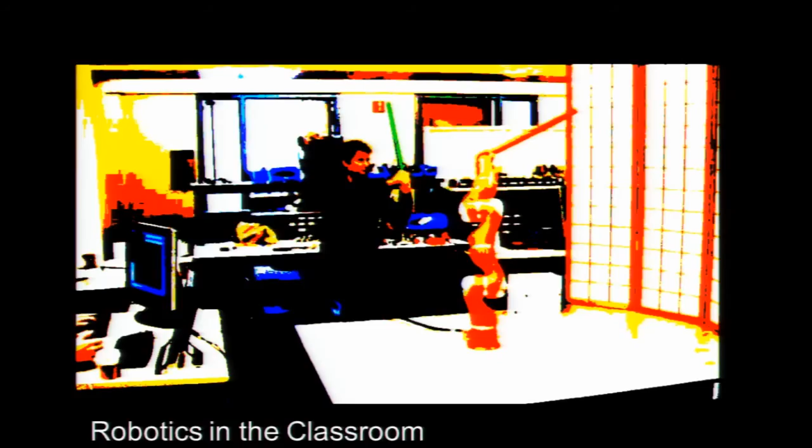Our students love it. This is one example of the experimental work. This is actually class work, a project of 3 weeks, where the students are programming the robot to attack, to fight, to defend, and to perceive the humans, and doing all of it in about 3 weeks. So we should recognize that really there is possibilities of interaction. We can now do it. And what are the challenges and what are the things that we are facing in those areas?

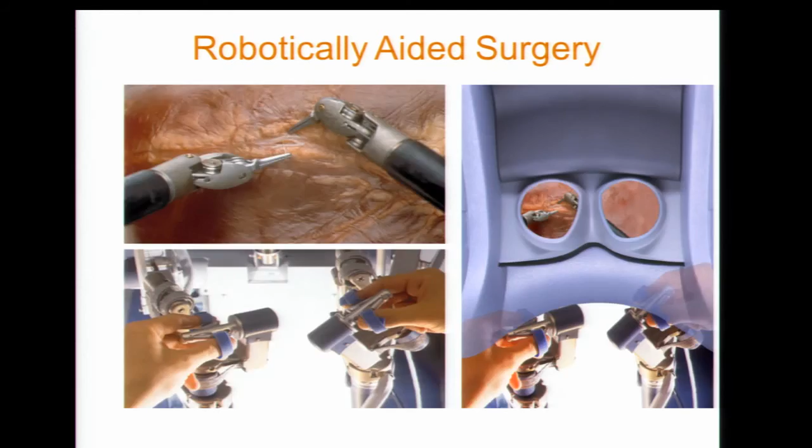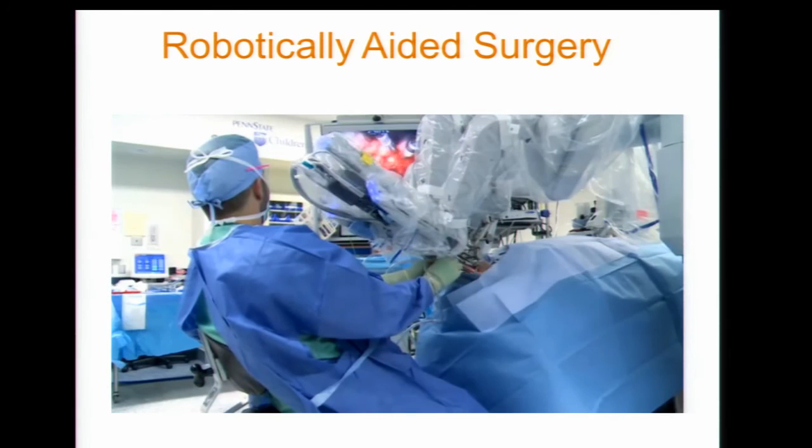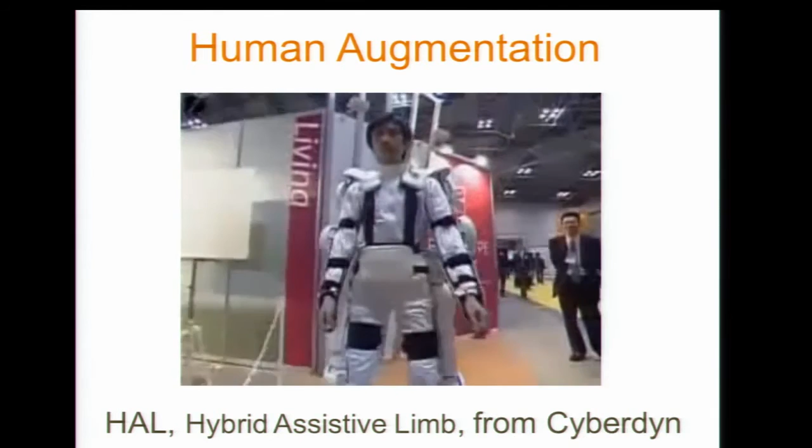So we know the success in medical robotics, the success of now doing minimally invasive surgery, doing this by connecting the human to a robot through a haptic device that is still not using the feedback in one way, we are using mostly vision. We are using more haptic and maybe some more feedback with catheter technology. This is some work from Hansen technology. There are a number of other applications where we see the human and the machine together.

But really what I would like to talk about is those new challenges that we can imagine. And to talk about it, I'm going to take the example of this boat. This is archaeology underwater. And this is a boat called La Lune in French, which is the moon. And it's a 1700 boat that was returning to France and sunk off the coast of Toulon, about 20 miles off the coast, 100 meters down.

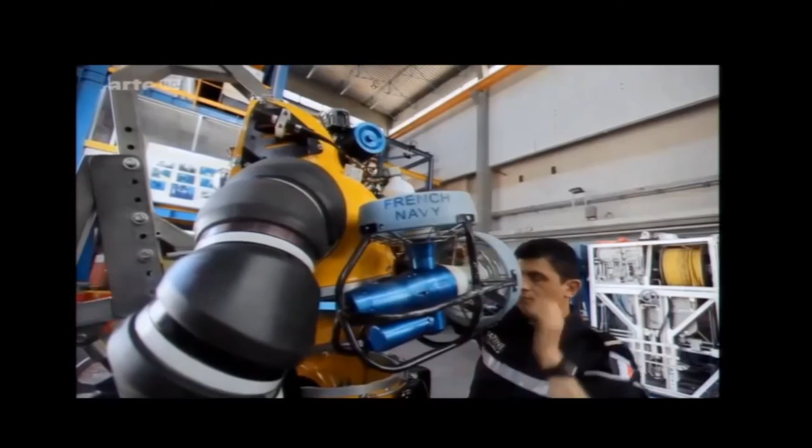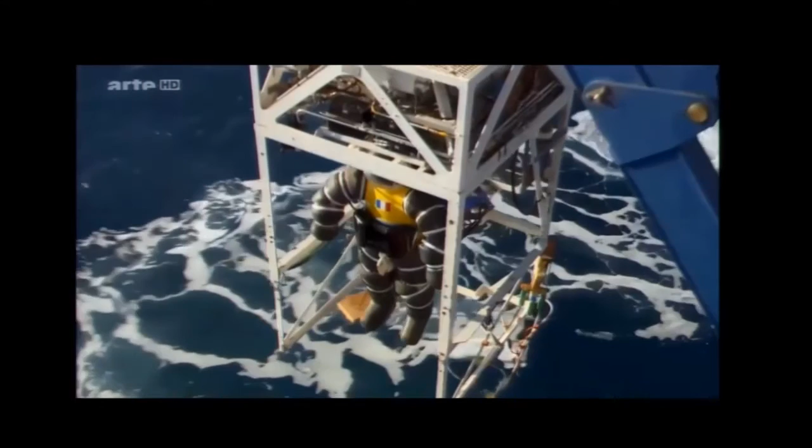So any idea about going there will prevent divers, because diving can be done at 30, 35 meters, but 40 meters is really the limit. And what you need to do is to build a very heavy, stiff suit where you place the human inside. And now this suit cannot be operated by the human inside. Obviously, you have thrusters. It's very complex. They operate it from the boat. This is the scientific boat that is lowering now the human to that area, and this could work up to 150, 200 meters. So below, then it becomes another problem.

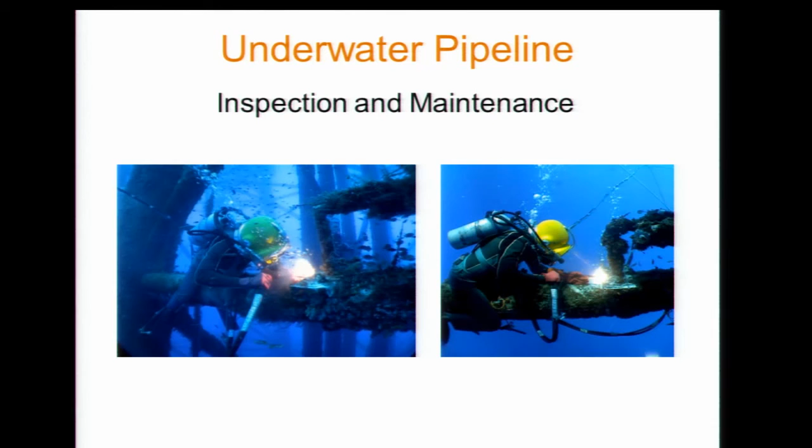And the question is, can't we do better? The human is there just because the human is going to be able to grasp one of those objects and put them in a container, and that would be sent up to the boat. So the problem today is not only in underwater archaeology, but in coral reef monitoring. It's really, really difficult to think about ways of going there, placing sensors, collecting samples. If we think about all the structures underwater, there are so many problems that we need to have a manual manipulation intervention that requires human divers, and it is really a dangerous, challenging problem.

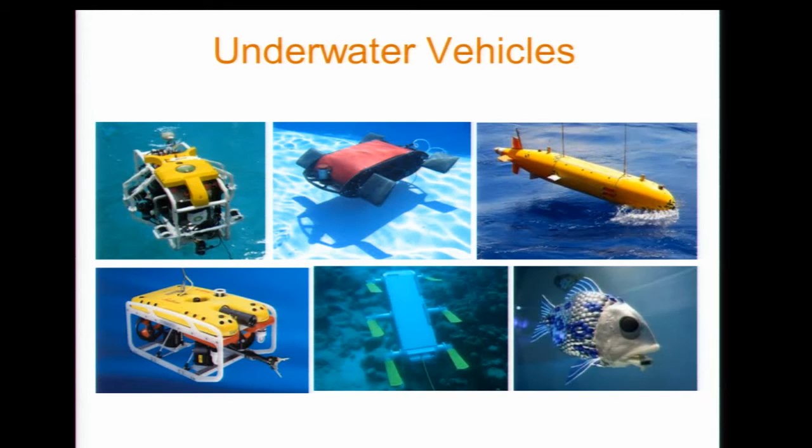Now, the state of the art in robotics is really fantastic in terms of underwater observation. That is, we have underwater vehicles that can observe, that can see, that can map areas. But we have little capabilities of manipulation. I mean, we have some manipulators that are really difficult to operate. They need to be teleoperated. We don't really have the capabilities of doing like we can do on the ground, mobile manipulation.

And that brought this idea of Ocean One. Ocean One is a robot that we've been building over the past 4 years. And Ocean One is a bimanual robot with hands, head. I mean, you can think about it like a humanoid robot underwater.

It doesn't have legs, but it is operated with thrusters, so it's adapted to the water. And the coolest part about it is that this robot is connected to the human. And when this robot is going to touch the bottom of the ocean, you can feel it in your hands. And that is because the concept that we are using is to connect the haptic device to this robot through fast communication that allows us to feel and interact, not to teleoperate the robot.

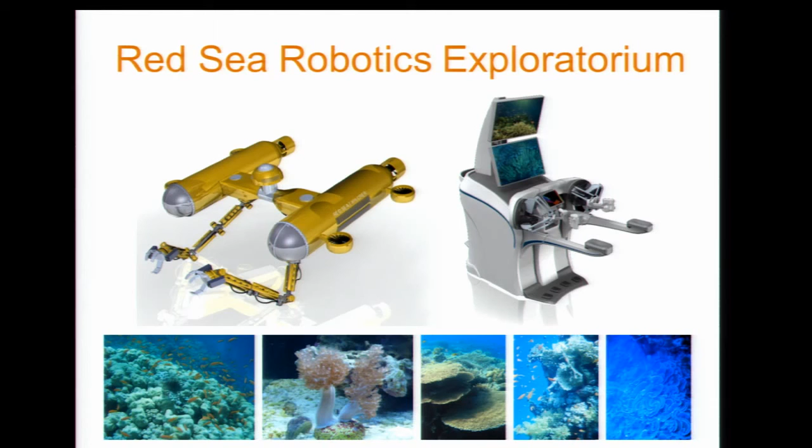We don't want a human to teleoperate it. It wouldn't work, because humans would be very bad at creating those manipulation interactions. But a human can intervene at any moment in the system.

And to do that, you can imagine a seabed village of robots connected to a station where they can get power. They can also make a connection, fast connection. Acoustic is not good for fast connection, so we use optical modem. And optical modem is light, which is attenuated, so we have limited distance. So that station is very important to do the connection to the boat where a human is interacting.

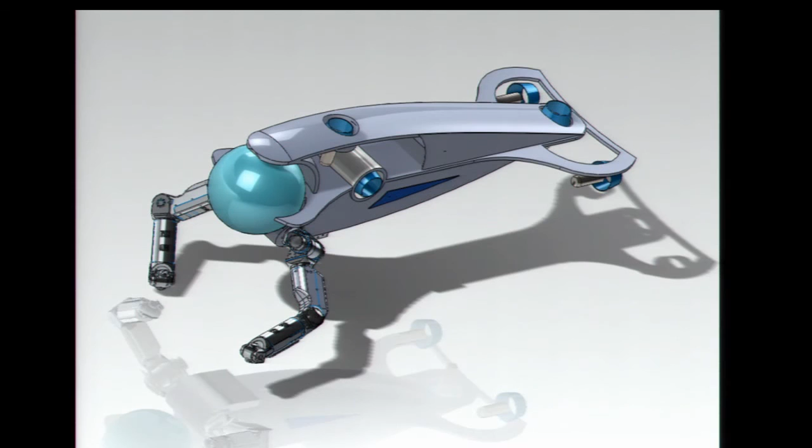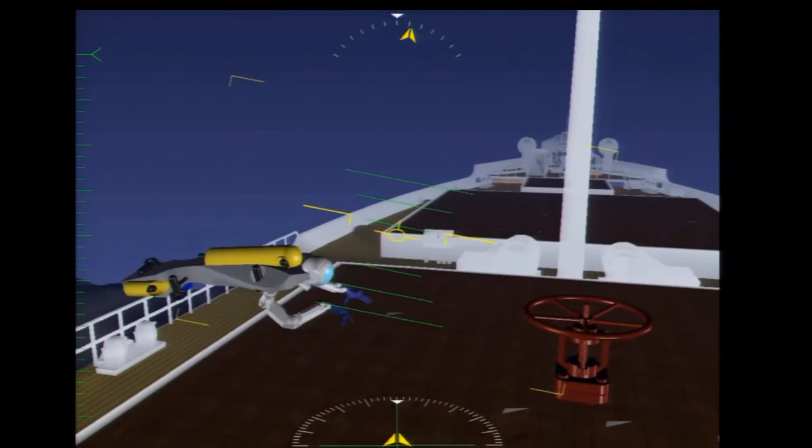So the design was amazing in terms of complexity. We start with the bimanual manipulation, and then we find electronics, more and more things that are needed. And then we are not talking about designing a vehicle and attaching arms. We are talking about designing a whole system together, where we need really to understand the dynamics of the vehicle, which is slow, compared to the dynamics of the arms that is faster, and design a macro-mini structure that allows us to build those capabilities for dynamic control and operations underwater.

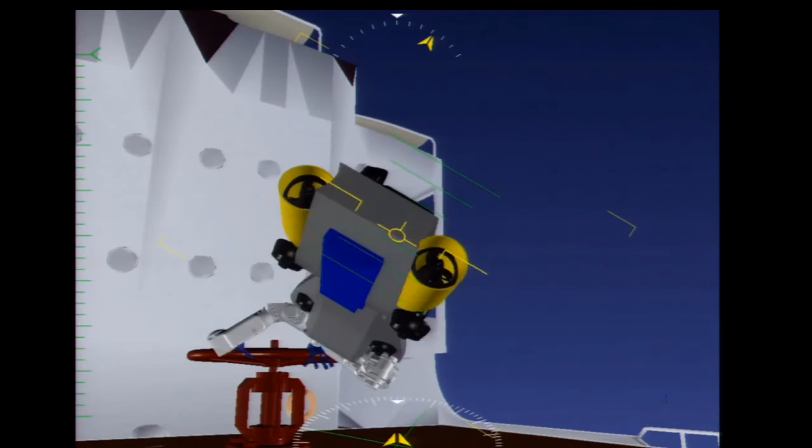Fabrication, we've been lucky to have the help of Meka Robotics with the arms, but we had to redesign the whole arms together with them. And we had also to build all the electronics. The students worked for years on this project, building the body of the robot, assembling, putting many different things. The first tests of the robot were done in July, and at the end of August, we were operating the vehicle itself, and the robot was moving with all the electronics without frying underwater, which was a milestone.

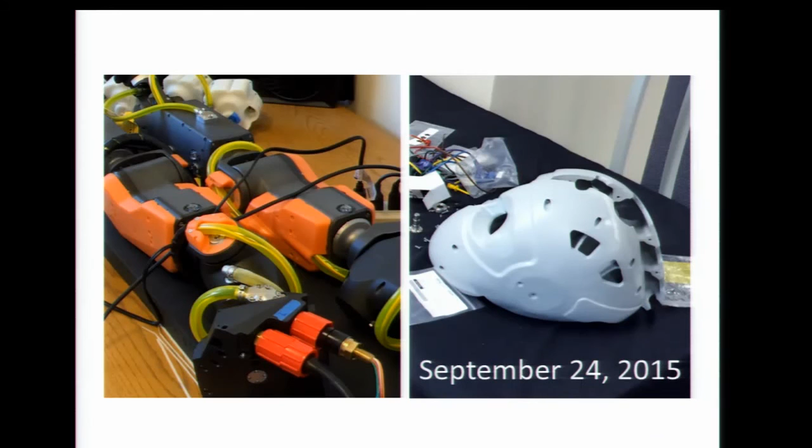The aim was to get the robot ready for IROS. If I recall, it was the 29th of September. And IROS was a challenge for us because the robot arms arrived on the 24th. And very quickly, in a few days, we assembled the robot, put it in the water, and for the 29th, we were able to connect Hamburg to Stanford. So the robot was at Stanford, and we started the initial interaction from Hamburg all the way back to Stanford. So this is just to give you an idea about one example of one challenging environment.

Why can't we do the same thing for mining? How many accidents in mining do we have? Can't we replace a worker in the mines? I really believe it's possible. It's not going to be completely autonomous. It will be a very complex environment, many difficult tasks. We will still need the skills of the human, and we might be able to connect the human, extracting the human physically from the dangerous area, and placing the human where the human is safe, but still able to operate a robot that is placed inside the mine.

The same thing for geologists. These areas are the most dangerous areas. They are just opened, and we are sending humans there. We think about high altitude stations. We cannot leave humans there, and operating the stations is very, very difficult. So can't we place robots that somehow are connected to humans, and humans can operate them or intervene when help is needed?

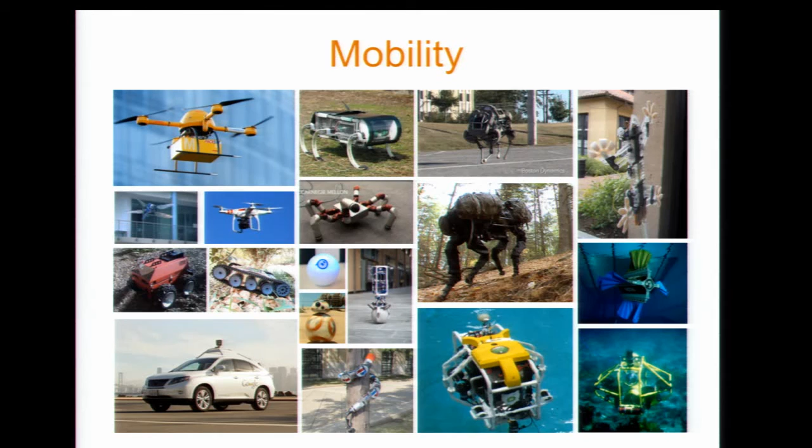So we saw in the past years a lot of progress in mobility. Robotic mobility has been really amazing, in terms of all the new capabilities that we are seeing, from flying robots to smart vehicles to underwater vehicles. All of those are bringing that capability. But what is still missing is the manipulation ability to be combined with mobility. So going beyond mobility, we really have to think about the integration of those two capabilities.

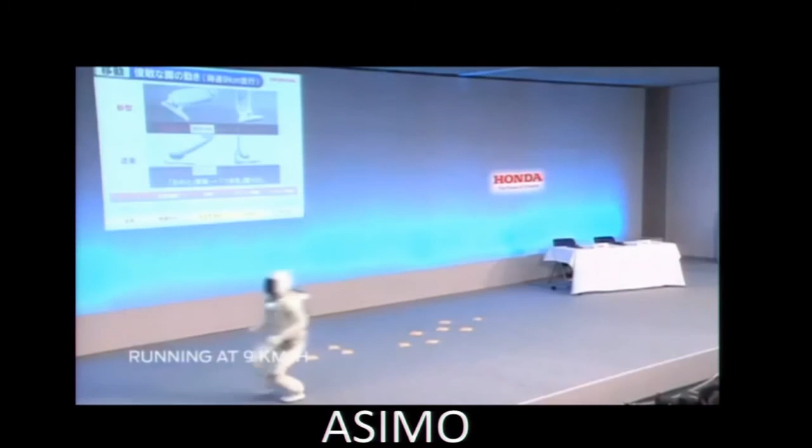And I have the example of ASIMO here. ASIMO was studying at Stanford and failed for many years, so we kept him for 12 years at Stanford before graduating ASIMO.

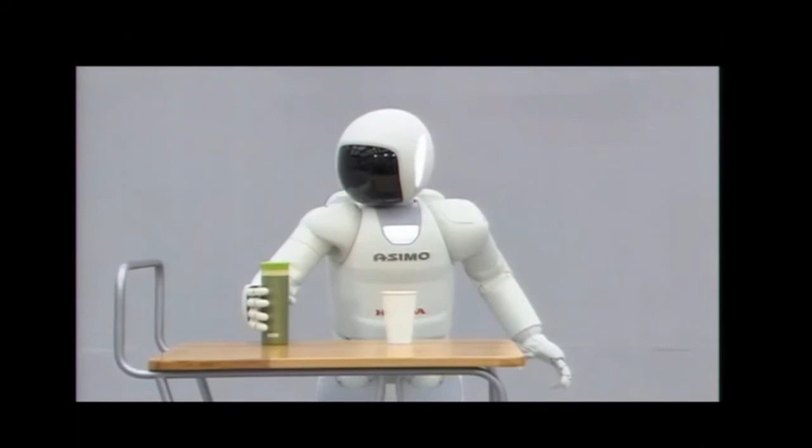And the reason we wanted to teach ASIMO something more was that if you really want to interact with the world with a robot, a humanoid robot, you are going to need to integrate the capability of manipulation and the capabilities of mobility in one integrated system. So the mechanism appears to bring this capability. We can see it is possible.

The question we need to ask ourselves is how much programming goes into this. Essentially, Honda goes by moving and teaching every joint motion, integrating them all together to create this behavior. And if we change the location of anything, we have to reprogram again. So how come a little child can do it? And Peter has an answer to that, right?

I mean, we have skills, and we have a process that goes, and we don't think about it. It is going to be almost automatic if we acquire this process and bring it to human. So programming was used and was fine as long as we were doing over and over the same task. In industrial robotics, that was fine. We spent a lot of money. The most expensive part of automation is building the assembly line and programming the assembly line, which makes it very difficult for small companies to have assembly lines.

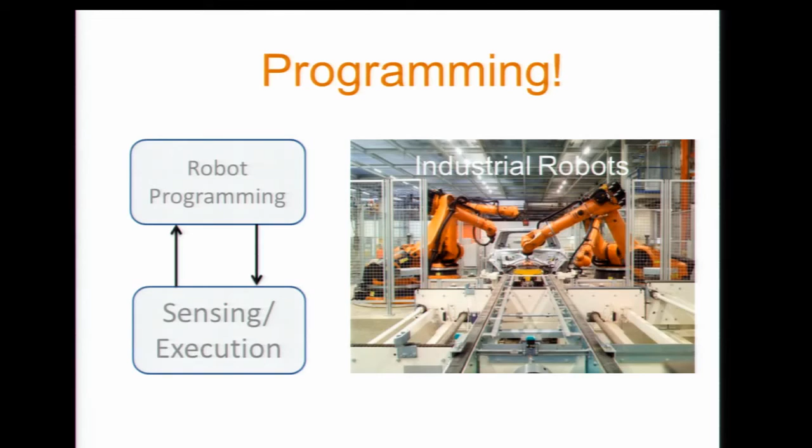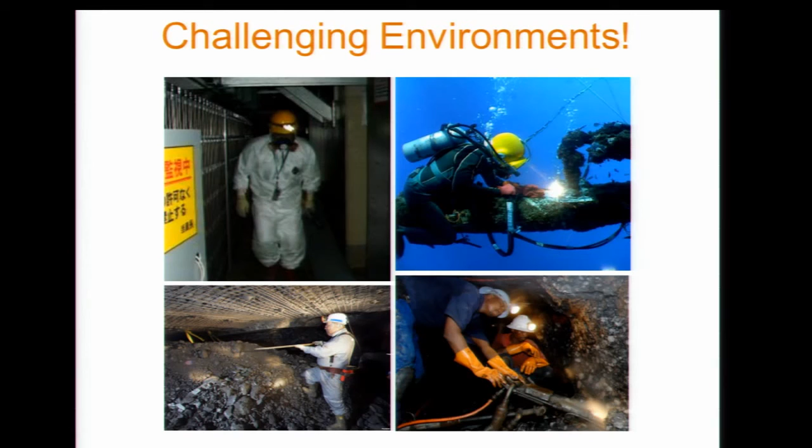But basically it works once we put all the fixtures, the jigs, and integrate the robot to do the simple task. Now, if we are talking seriously about taking robots in those environments, well, then we really better think about it again and see how this can be done. We cannot anymore go and program at the lowest level of the robot. We would like to acquire skills, but we would like those skills to be encoded in ways where now we can plan with higher level skills and behavior that the robot can use, and then also connect the human to those behaviors. So as much as we need the robots, they also need us.

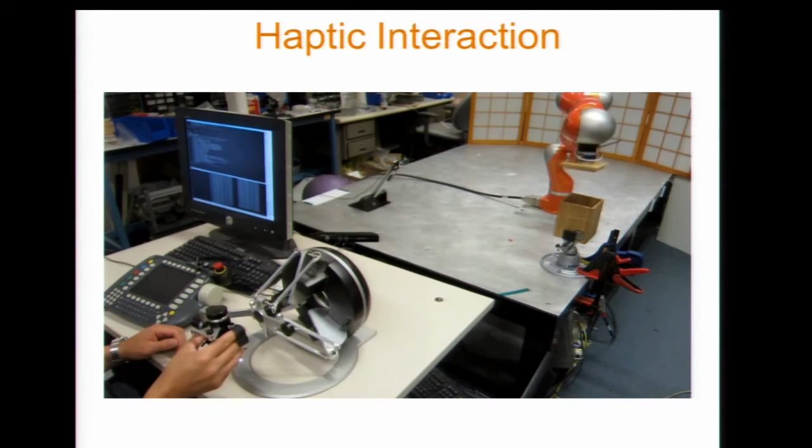And one of the basic interactions you can think about is, here is the haptic device interacting with the robot. So typically we interact with a virtual environment. Now we go all the way to the physical environment. When we touch, we feel it. But this is a way to teach the robot to interact and also to feel what the robot is doing in action.

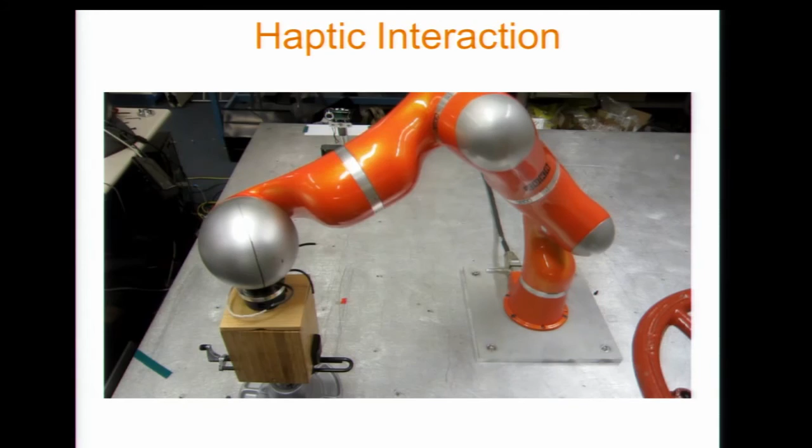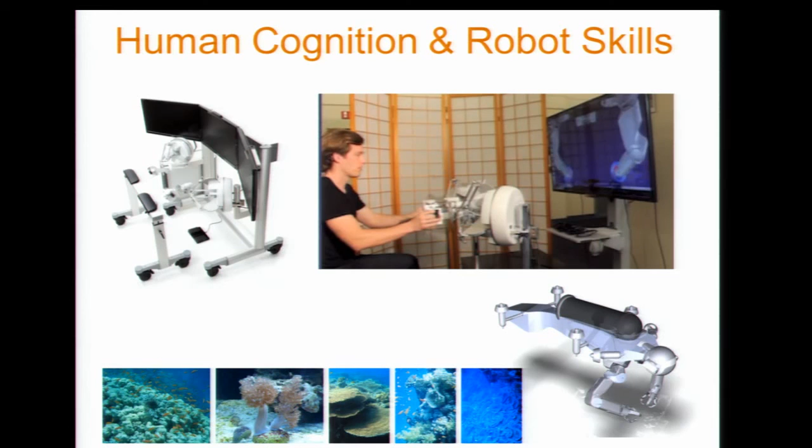Now, this concept is now taken underwater, with a more sophisticated haptic device that has 6 degrees of freedom, and the robot now is diving, and we are in the environment of the water, and we interact. But this is our first stage where we are going to be able to, in fact, design our robot before even building it. So the idea is, when we're going to develop a robot, it is the wrong thing to think a human can teleoperate contact. They will crash the robot.

And I had this experience a long time ago with Tecnomare in Italy, where operators were supposed to do some inspection underwater through teleoperation. It was so difficult for them. And as soon as we placed a few force sensors, tactile sensors on the robot, they just push, and the robot will adapt to the environment and make the contact and co-locate the sensors with the control, with everything, and get that stability. So we really need to build those advanced skills on the robot to operate and let the human intervene when there is a difficult, challenging problem.

So there are many features about how to get there, and I'm going very quickly to go over some of the things before showing you some of the results. So manipulation skills. Humans are amazing at it. How can we get them to robots? Well, I really would like to see, first of all, capabilities that are general. And in order to generalize, we need to understand this skill from the human and map it to the robot. Robot and human are different. Humans use forward prediction, robots use feedback.

One of the key feedbacks is force control and compliant motion control. Here what you see is something that is done without any programming of trajectories. It's based on the contact information that is guiding the motion. From any initial condition with the same program, the contact forces are guiding the motion to achieve this behavior. Well, this relies on a capability called torque control. Unless we have torque control on the robot, unless we are able to remove the actuation, remove the gears, and make the robot fully compliant, it's going to be very difficult to implement any of those techniques.

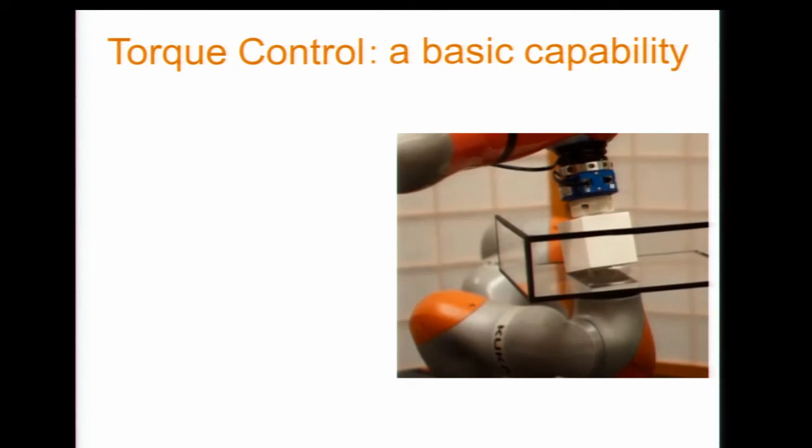So this is one of the things that we were missing for many years. And the reason was most robots were designed for industrial robotics, where you are dealing with position control, you're programming everything ahead of time. So this is a capability that is essential for dynamics, essential for compliance, and for everything else.

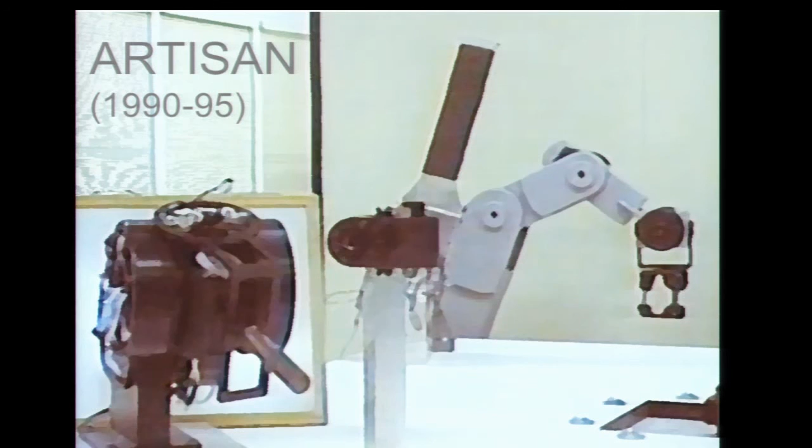In fact, in the mid-90s, we built the first torque-controlled robot. And you can see one part of it over here. And this is aerodynamic ping pong that is done by just blowing on the robot to show you the level of performance that you can achieve just by using proper control. We've been spending so much effort fighting with the robots rather than really using those robots.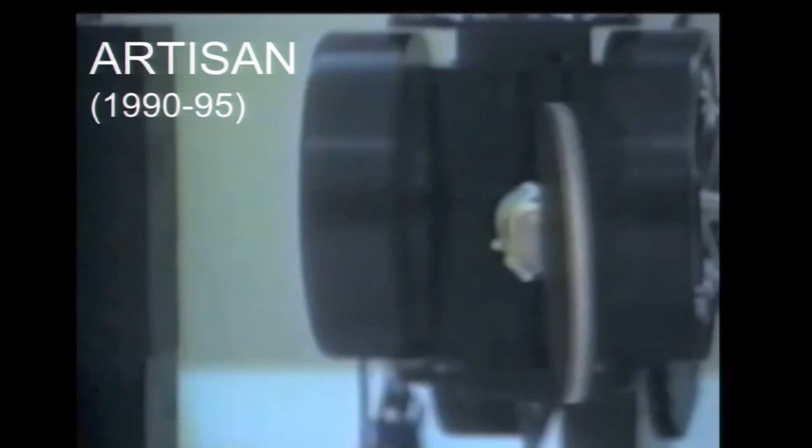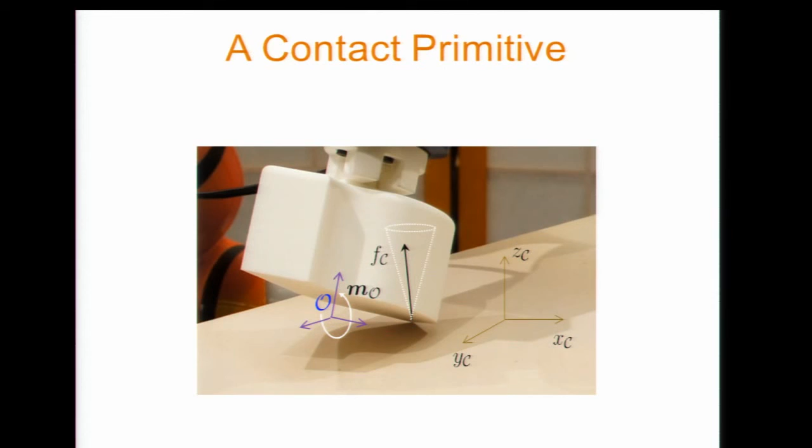In fact, this technology was completed by DLR and led to the KUKA robot, which uses the same technology of torque control. Now, once we have torque control and force sensing and force control, then we can measure this force at the contact. And if we measure this force at the contact, we can resolve it as a moment about a centroid that is related to the geometry. And now this centroid, the centroid of compliance, is going to allow us to perform the motion.

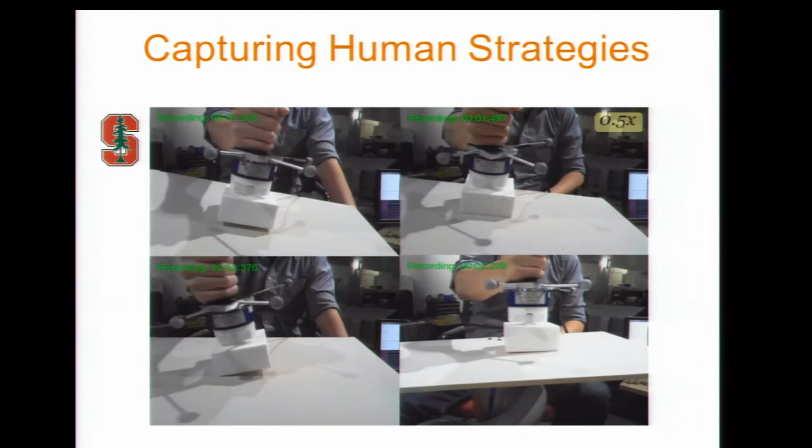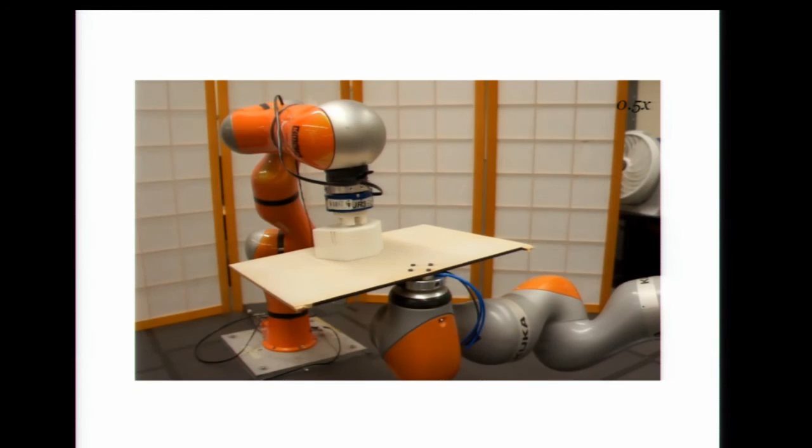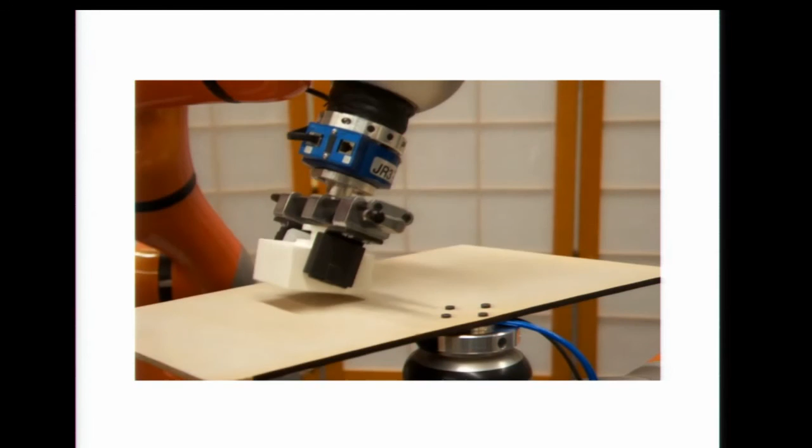So we can conduct those experiments with the human, and now we can ask the human and record forces and motion of the human. And the objective here is to be able to generalize around one behavior. This is just one example of one behavior. And now the generalization of it is mapped to the robot over different geometries, different material, different grasping locations. And the robot is able to do it. Even if we disturb the position where the robot is grasping, the task is still performed, even if we disturb the robot itself.

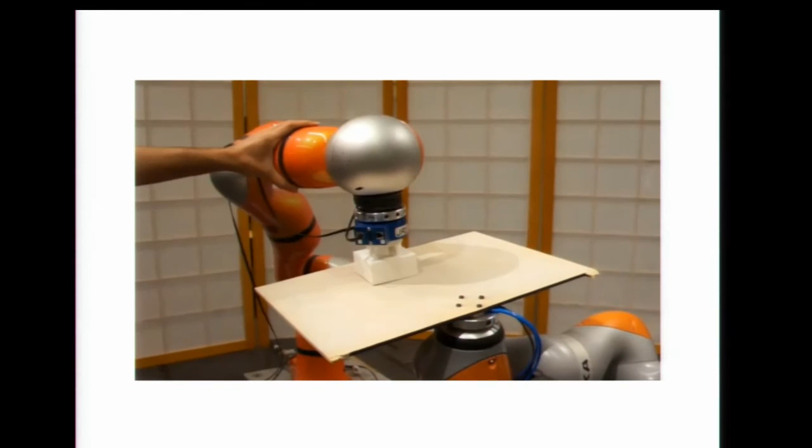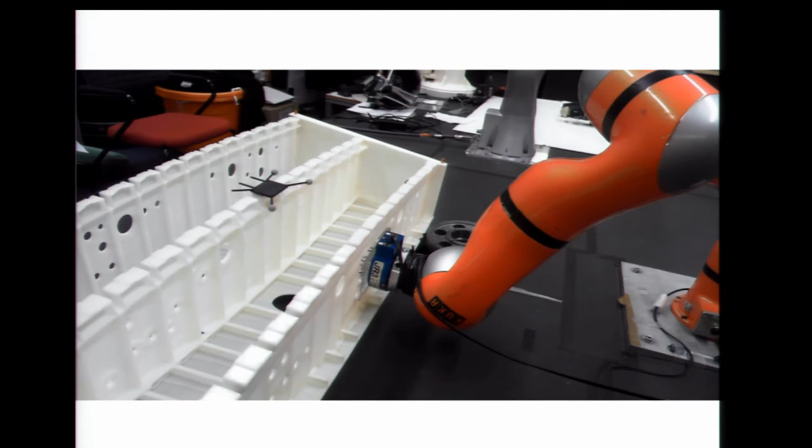So now this simple primitive that we have can be combined with other primitives through transitions. And this is an example of how this could be applied. This is a small part of the 787 Boeing wing, where the robot is supposed to place this object there. And these are several primitives that are being executed, and there are transitions between them, and we disturb the robot every time, and the robot executes the program to reach that configuration. So this type of robustness is coming from our understanding of how we are able now to perform those compliant motion primitives reliably and capture also a whole program for executing a more complex behavior.

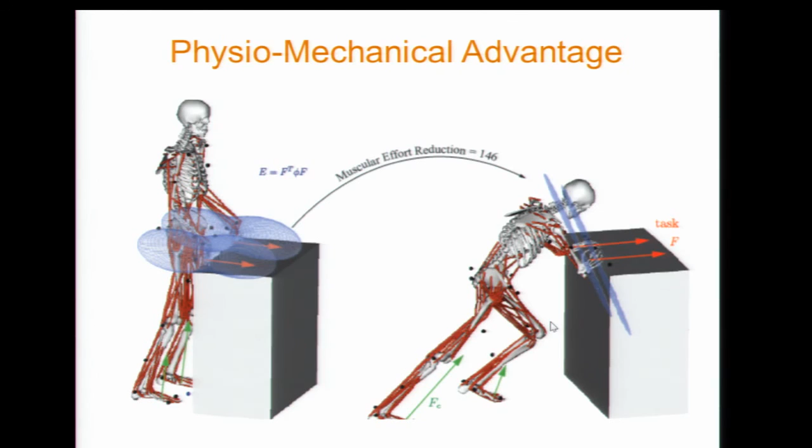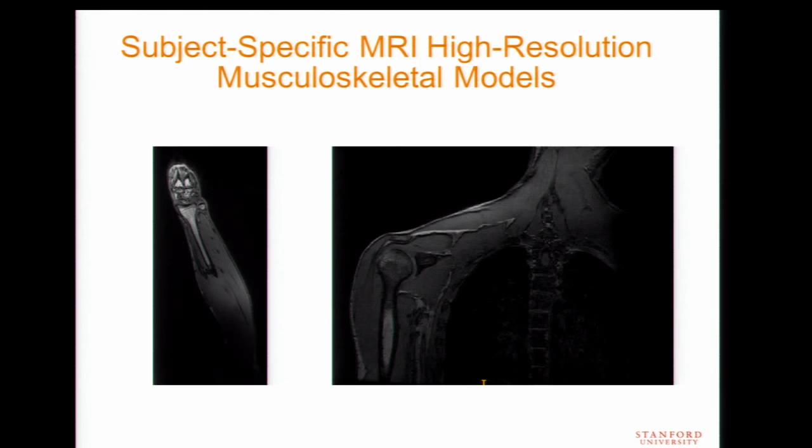So now, if we have that, then we can go to each of the subjects and analyze the motion and look. This is actually a Stanford athlete that was injured by maybe a Cal athlete, I don't know. And now we're reconstructing the motion, and then we are going to be able to analyze that motion and then prescribe exercises, or we are looking at high performance motion, and then we are going to prescribe how to improve performance.

Anyone here play tennis? Okay, tennis. Would you need some help? Do you need any help with improving your tennis, or are we fine?

We discovered the secret, actually. There is something about how you look at the capacity of your muscle, your posture, and how you determine the capacity of the tip to accelerate. And that is really subject-specific. Very often we imitate. Imitating is not a good idea.

So there is a specific characteristic for every subject, and we can trace your lines of acceleration and how to build momentum for every subject in a very distinct way from others. And well, this is a very, very interesting topic, but this is now applying robotics to humans.

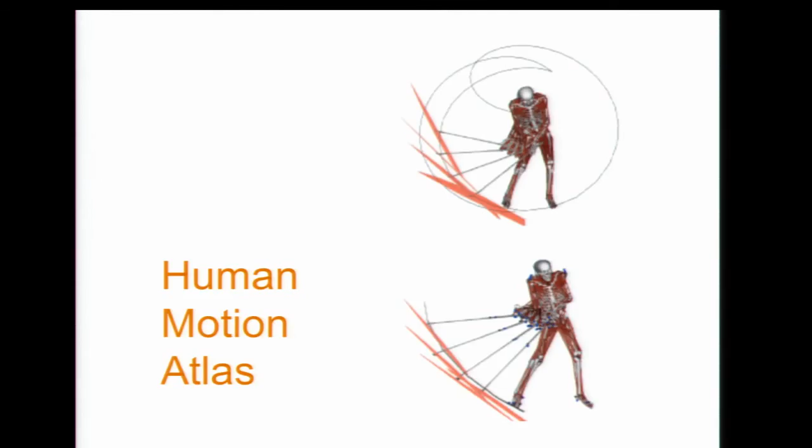In fact, we are pursuing another project where we are taking haptics to create a task-meaningful environment inside MRI, so that we can look at activity in the brain, to understand how humans represent tasks, and then connect that to physiology by looking at the forces and the motion.

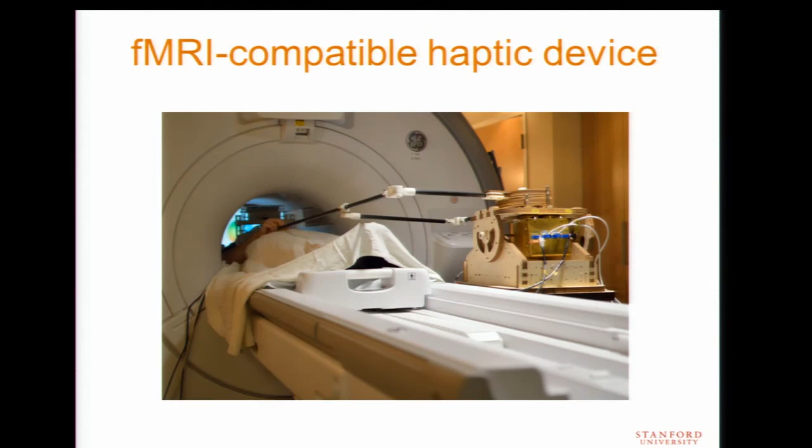And this is actually the device, which now is extended to have 6 degrees of freedom. And that is allowing us to combine for the first time both activities and do those activities in a meaningful way. That is, we do more complex behavior, because inside the MRI you are confined. You cannot do too much. And here you can, through the haptics, stimulate the brain to do much more complex tasks.

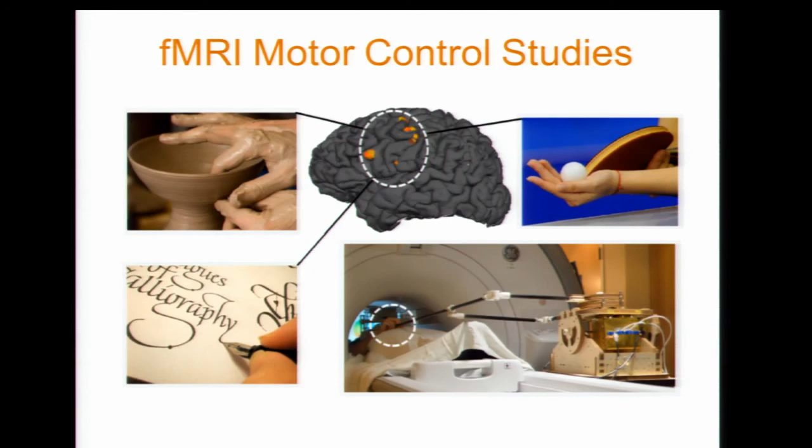Another problem: we talk about compliance. So this is really exciting, but compliance is not only about one-point contact. It's about the fact that your robot is going to touch at multiple points, and this is always the case in any complex task. You're going to brace, you're going to reach, you're going to apply specific forces, and you're going to have reaction forces.

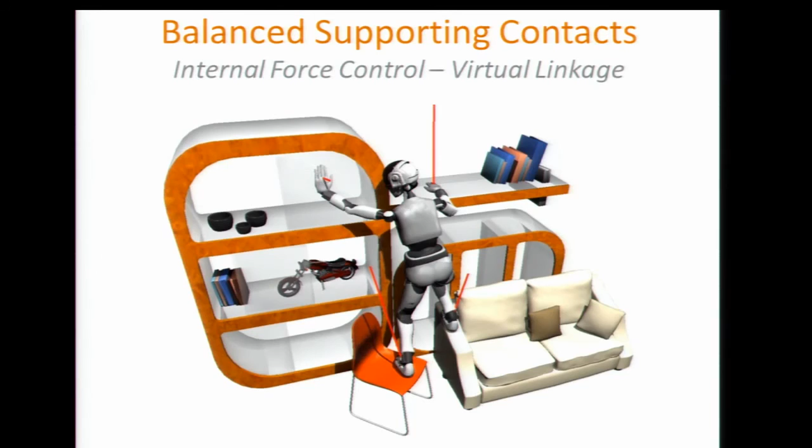One thing that the community has forgotten about those multi-contacts is the fact that anytime you have 2 contacts, you create internal forces in addition to the resulting forces. And if you forget about your internal forces, you go unbalanced. No wonder at the DRC we had a lot of problems, unless you really model your internal forces. So you need a model.

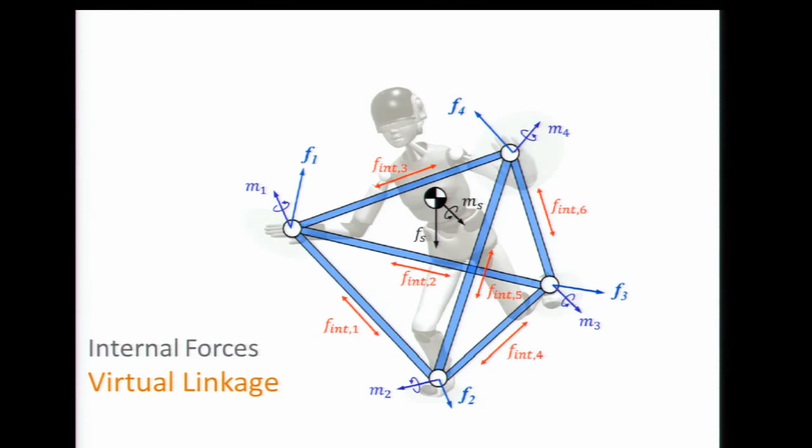We introduced a model called the virtual linkage that captures all the internal forces and resultant forces, and that allows us now to implement compliance at multiple points, and that is going to take us to putting in one component of the control, because contact is one aspect. You have the posture, you have the task, motion, you have all the contacts, you have collision, self-collision, you have obstacles, what else? Balance. Okay, how can we do this?

This is really challenging. Now the problem is we have to do this in real time. We have the tools. We can take all this problem and map it to configuration space, map our obstacles, and do an optimization in C space. Obviously, it will take hours to come up with a solution, and as soon as we start moving, we're going to discover that we need to redo it again. We change contact, or we change the environment, or we discover a new obstacle, and everything needs to be redone.

So to do this in real time online, there is really a key model for us, and this is the human. Humans actually never resolve the whole problem as a complete problem. We focus on the task. We assume that we have the ability to control our posture and adapt it to where the task is going. We have separate controllers that are handling all these different things. So constraints can be handled if we control them.

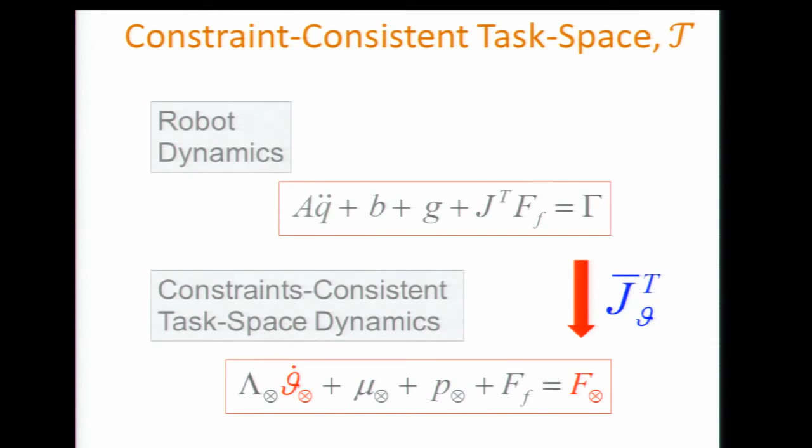Now we have, in that specific task description with constraints, the dynamics in that space. And once we have that dynamics, we can immediately decouple it through a standard control structure, nonlinear dynamic decoupling, that allows us to control the robot. We're in the proper space with all the constraints, through a gradient descent that's taking care of all these different things in real time.

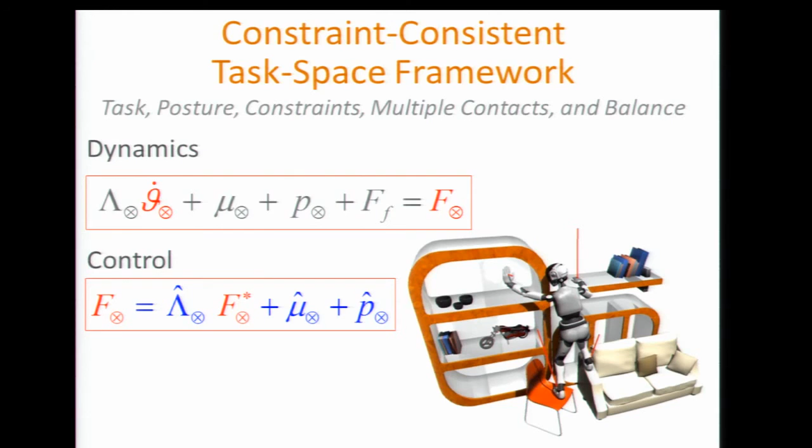So one thing about humanoid robots: if you approach them, people are really scared. Like if you go to a show of Asimo, they tell you there is one rule with Asimo: don't touch it. Because if you touch the robot, you create reaction forces, and immediately you interrupt the trajectory, and the robot will fall.

And with our robot, we just broke that rule. Now the robot is guided by your hands. It is feeling your force and is going in the direction you're guiding the robot. It's making contact without bouncing. There are no trajectories to talk about. It is behaviors that are controlling the posture of the robot, controlling its motion, controlling its contact.

Now we tell the robot, okay, don't touch my hand, all right? And the robot sees your hand and creates the repulsive force, and it moves away from your hand.

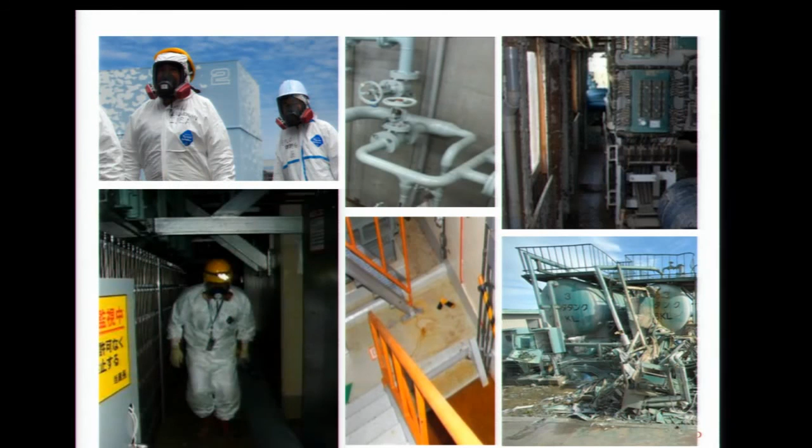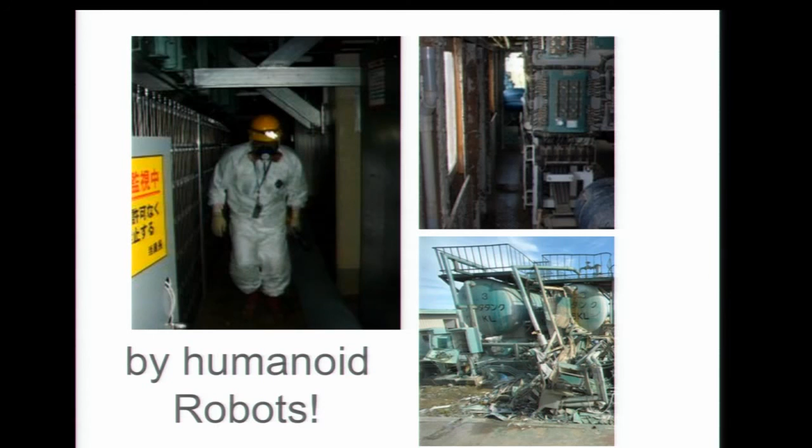Now, if we start to think why we cannot take these today and replace this worker in Fukushima by a humanoid robot, what is the problem? Well, the problem is most humanoid robots were designed with controllers that use ZMP, zero moment point, that assume a flat indoor environment basically. And if you're in a flat environment controller and you go out in 3 dimensions, it's going to fail.

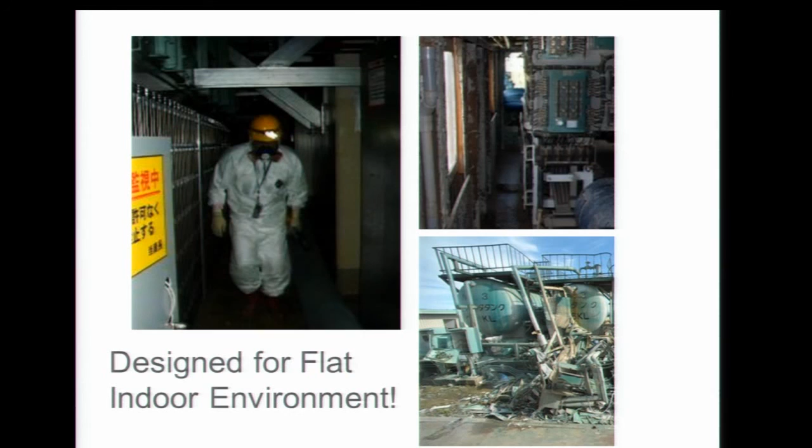In addition to the fact that you're going to have to deal with a lot of different points of compliance. So the first thing we are going to do is take our models and say, we're going to move like humans, using the environment, using contact.

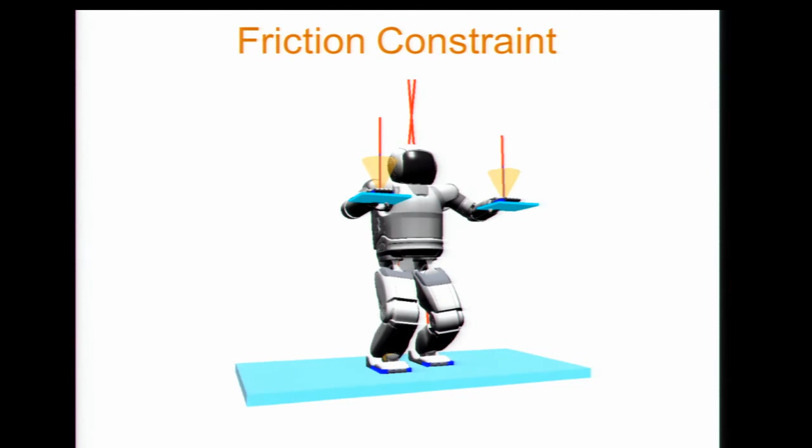So using contact means we're going to make use of surfaces that are slippery, so we need to model the friction. And if we model the friction and model the dynamics, now the robot is capable of making contact, putting all the reaction forces inside the cone of friction so you do not slip, and then dealing with the dynamics and the fact that all these contacts are moving.

This is really remarkable, but if you want to be more surprised, I can show you something even more challenging. In climbing, you really don't like slippery surfaces, I mean it is not really a good thing. So we're going to take HRP-4C and put it on a slippery surface, and now you can see immediately that balance is very, very difficult for the robot unless you have the proper models to distribute the forces for this under-actuated robot, because you're still missing 6 motors, right? It's not connected to the ground.

So this idea is the beginning of thinking, okay, what else do humans do to move in those challenging environments? Well, we use tools to balance. So why don't we extend the capability of the robot, go from biped to triped to quadruped to multiped? Any number of contacts can now support your robot.

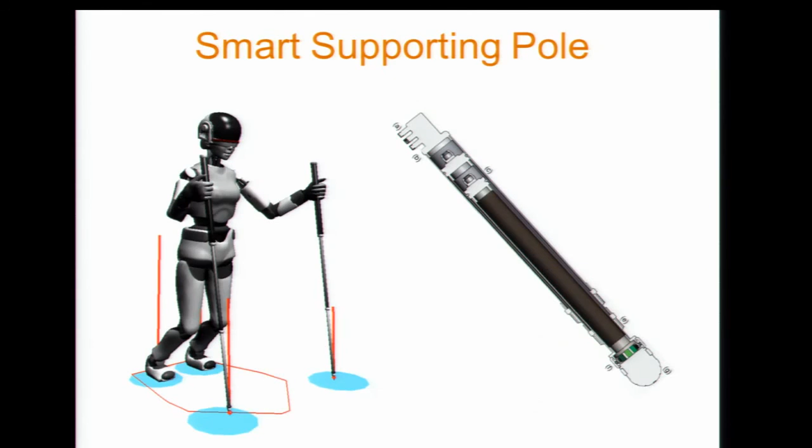And now with this, you have a sensor that you are probing the environment with. You increase your support area, and then you look, you plan some potential locations, you check them out every step, and then you decide, okay, the next one is feasible or not feasible, and you make your selection. But obviously, you need to modify your selection because the environment is always changing, you discover new things in the environment.

So we take our plan, and this is something we worked on within mobile manipulation, to create an elastic plan that deforms, so you take the plan and treat it like a physical object, like an elastic, that deforms through your sensory feedback, and we can in a few seconds replan everything without having to actually run a planning algorithm. Now, we apply all of this to a real robot, and we go back to our Red Sea Robotic Exploratorium.

That was the initial project that Stanford started with KAUST and Meka, aimed really at the coral reef environment, replacing human divers there. So the aim was collecting samples. They always have a lot of trouble collecting samples in the Red Sea, and there are huge areas to cover.

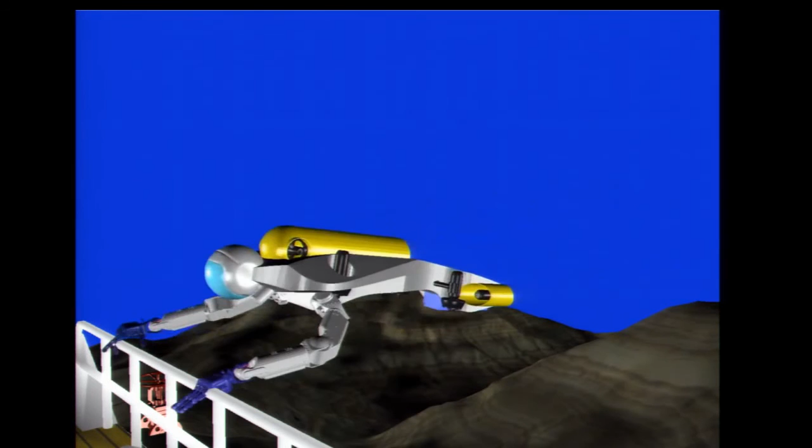And the challenge was really not to think about it like, okay, let's buy an underwater vehicle and attach a few arms. The Schilling makes very nice arms, you can attach them, and you're done. In fact, the problem was how to design a machine that takes advantage of the fact that your electrical arms are fast, while your body, using thrusters, is very slow. If you just try to use the thruster to stop and dock here, you will break it. Notice how the arms are bending, to take the inertia of the slow dynamics of the body.

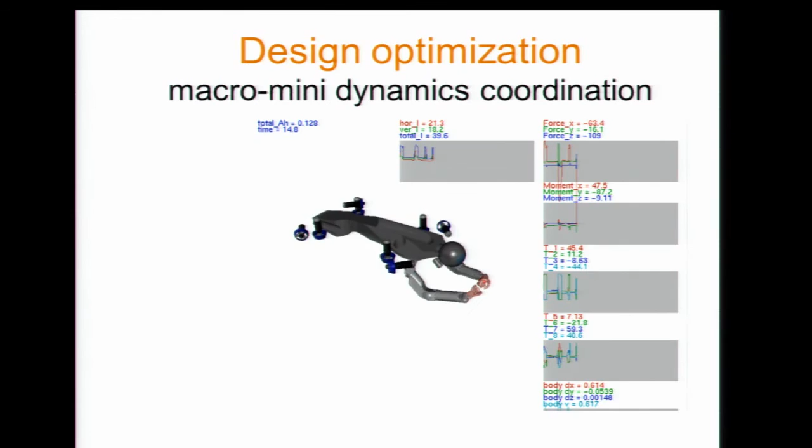And this was a large part of the design. When we designed the robot, we worked with a workspace where we can compensate for the slow dynamics of the body. You need to deal with that aspect of the dynamics and accelerate the response of the system through something we call the reduced effective inertia and the macro-mini dynamic coordination. So this was part of the design. When we designed the robot, it was to achieve those characteristics.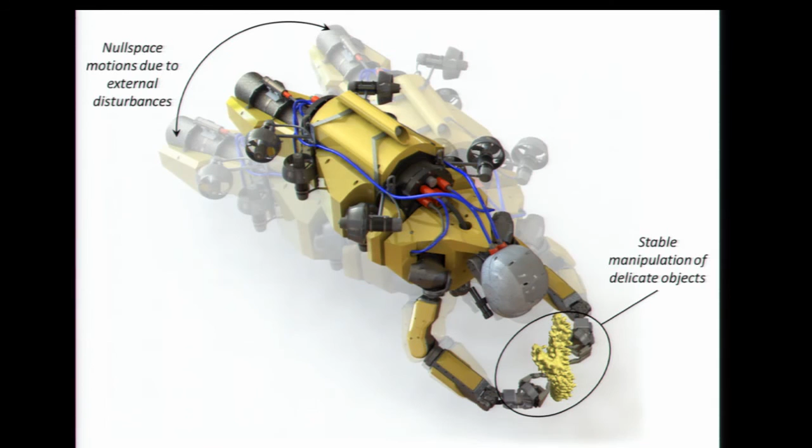So you couldn't just buy pieces and put it together and build a robot from a vehicle, arm, head, and body system that is integrated. The other thing is this robot is going to receive help from the human, so we need to build an interface that the human can use, so you can program different behaviors and remember them, but also intervene haptically with the robot.

So now the robot is moving underwater. This is a dynamic simulation in the water environment, and here the robot is going to operate; you have multiple views, a view from the bottom of the robot. When you are going to catch, I'm going to accelerate this a little bit. So now you catch the object, you take it, you place it, and then you go next to find the treasure the pirate left, and then you change the view.

So this environment is called SAI, and this environment allows us to simulate contact and produce physical behavior, and also produce all the characteristics of the robot.

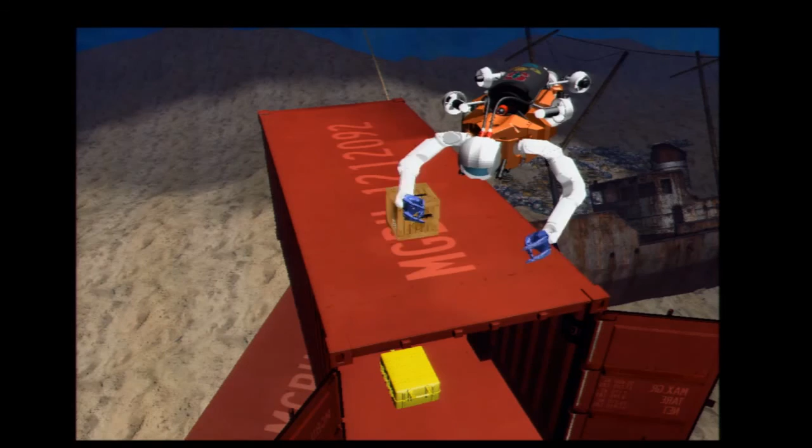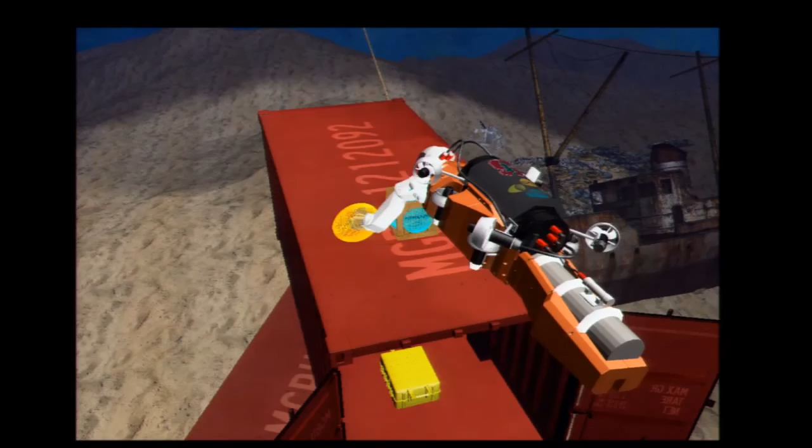One thing about grasping something we need to remember, let me show it in this context. When you look at the dynamics of each arm, you have properties of the effective masses in different directions. So when the arm is extended, the mass is very big, and if you touch an object, you produce large inertia. You have to be very careful approaching an object that has some mass. When you bring them together, you are actually adding them. So you have a discrete transition from a small mass to a large mass, and that makes it very important to integrate that dynamics in your model.

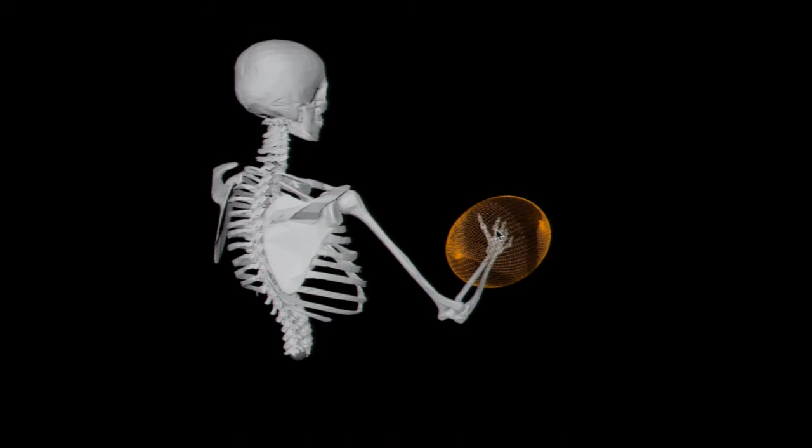This is exactly what happens with humans. If you are running to a wall, you don't do like this, you will break your arms. You have to go to a configuration where the arms have smaller impact forces, and those configurations are when you are in the proper workspace of the robot.

So now we bring multiple robots together. Those characteristics need to be integrated in the system. You need to make sure your robot is robust. So if we apply a large force at the tail, you see what is happening: the posture is changing, the task remains. This is how you build those priorities. You're saying my task needs to be achieved, I can modify, I can let the posture have a lower priority, and the robot is going to integrate that directly in the control system.

When they come together, you are going to have an augmented object for the first robot, the second robot, and all of these will be combined as a system of augmented objects with the model of the virtual linkage that allows us to control that interaction and deal even with those disturbances.

Okay, let's go to the pool.

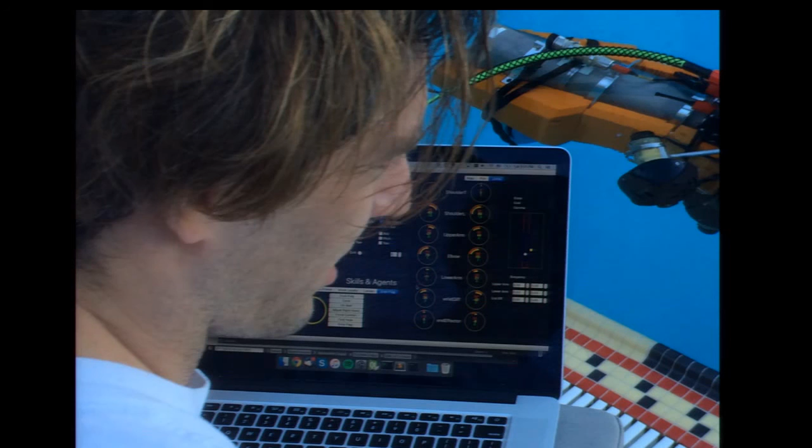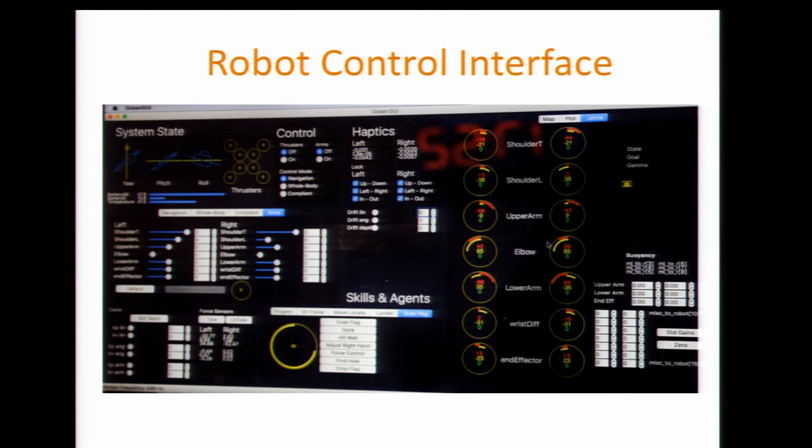So now we take the robot and we have this interface allowing us to control the arms, the body in different modes, the haptics, to integrate the skills. All of this is very simple. This is the operator, and basically you have access also to the haptic device to feel what the robot is stuck on, what the robot is touching, what kind of characteristics you have.

We were talking with Ken earlier this morning. I said it is like surgery underwater, basically. You're going to do surgery underwater.

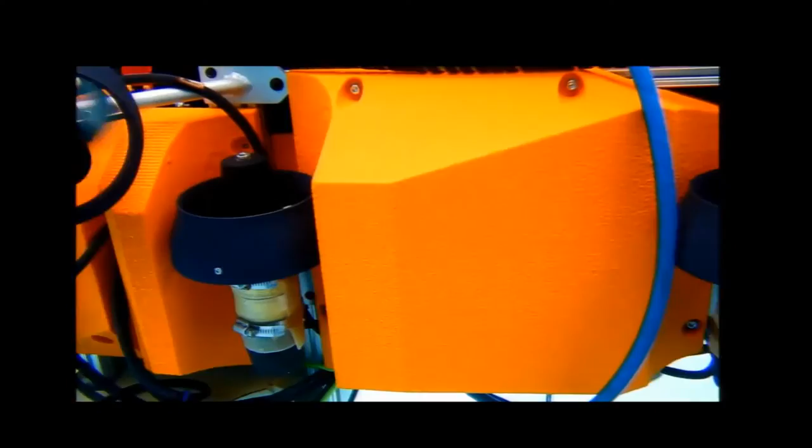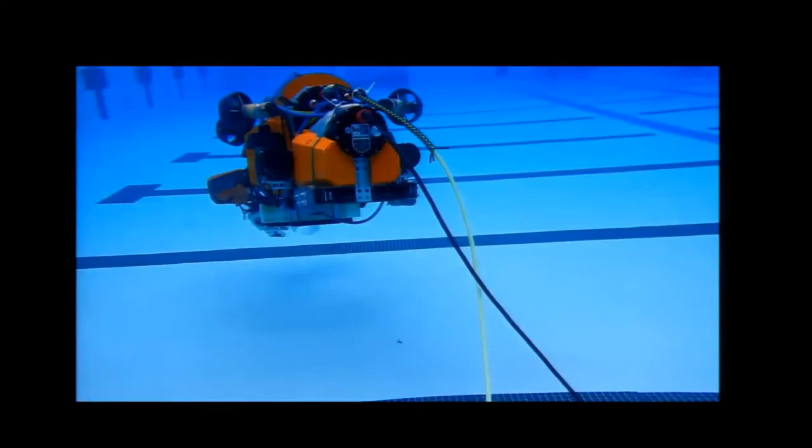About a month ago, February 9th, we managed to get all the pieces together, and here you see the robot in the water. This is at Stanford pool, and the robot is given a set of key points, and basically the robot is moving, and the operator is monitoring the motion. The robot is autonomous and has its own battery, but for the test we use a tether.

And the coolest part about this is that while the robot is swimming, look who's swimming next to it. I mean, it is like normal. We have robots in the pool, that's fine.

So once you want to touch the bottom, you can touch it, and you're now reflecting this with the force sensor back to the haptic device, and you are going to feel that force on the robot.

And in fact, all of this is an implementation of that architecture, as one example of all the different robots that you can have. I mean, it doesn't matter, it's underwater, it's climbing, or underground.

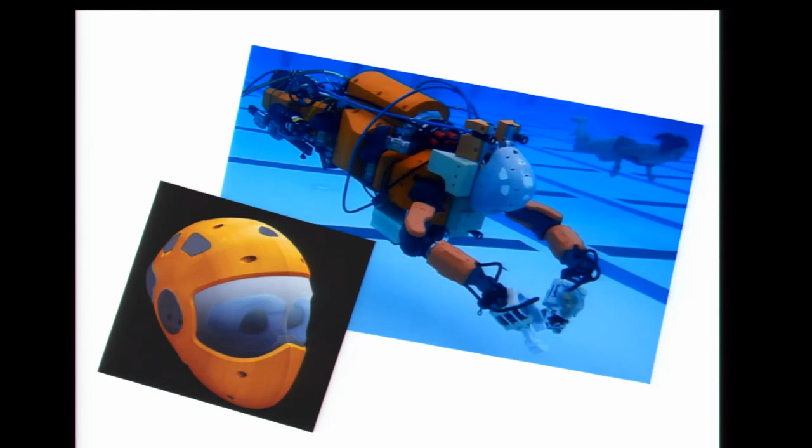So yesterday I got the design of the new head, because right now this is going to be arriving today. When I get back to Stanford, I'll probably see it. It's really cool.

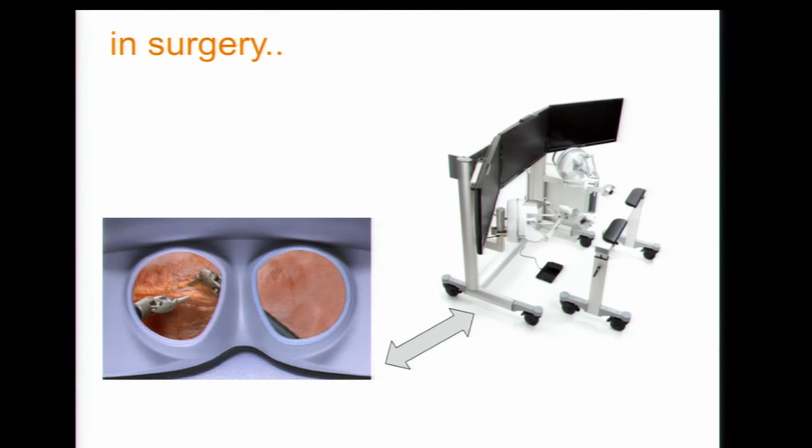Yeah, I was going to say, I mean, this architecture, yes, we're showing it here in the ocean. We showed it in climbing, but you can apply it in surgery. You can apply it for humanoid robots underground, in any field application.

These were one of the few students during those latest tests, but many people were involved in this. Thank you very much for your attention.

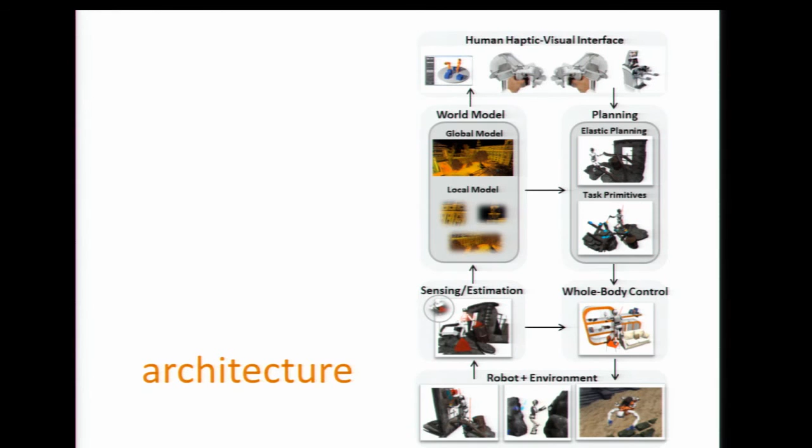Mm-hmm. Right. Yeah, that's what you missed when you were outside.

So yeah, that's fine. I talked about how we build primitives here by observing the human, not only motion, but essentially forces, and how we can, in fact, remove the motion trajectories and just focus on the interaction itself, and then abstract this to a representation. Basically we extract a strategy rather than trajectories and specific data. So the robot now is learning a strategy.

And in this case, does anyone have a phone here? Yeah, maybe I have a phone, yeah.

All right, so one of the strategies I was illustrating is the fact that if you are taking this and trying to make contact, if you make this contact, you're going to rotate in this direction. If you touch here first, you rotate in this direction. If you touch there, you rotate in the... Why? Well, there is a centroid that is going to be the centroid of compliance.

But abstracting your learning to that level, now you are learning that strategy, and then you go and implement it in the proper way with the capabilities of the robot, which are different from the capabilities of the human. We should never just take data from humans and map it directly to the robot because they are different. Robots can do feedback. They can sense the torque and the forces better, whereas humans rely much more on prediction. And humans are amazing at their skills, but with machines we can implement those strategies. Sometimes the strategies are not the same.